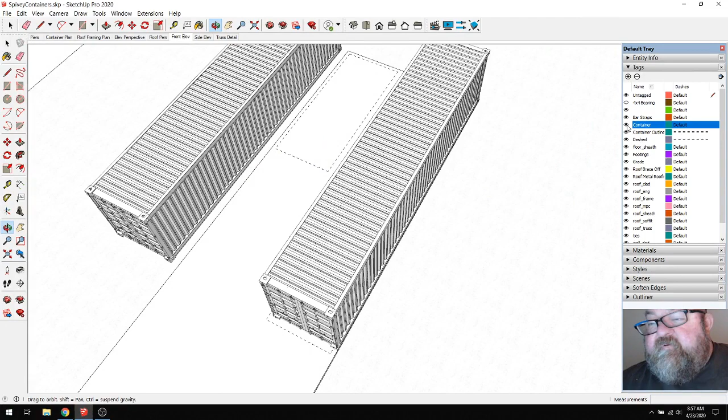Okay, so it is early on Thursday morning and it's raining, so I'm going to be doing some SketchUp work for a customer who has two containers that he wants to use for storage. Notice that they are for storage. I have two 40 footers, so I need a 20 footer. And I can't remember where I got these, so I'm going to go look.

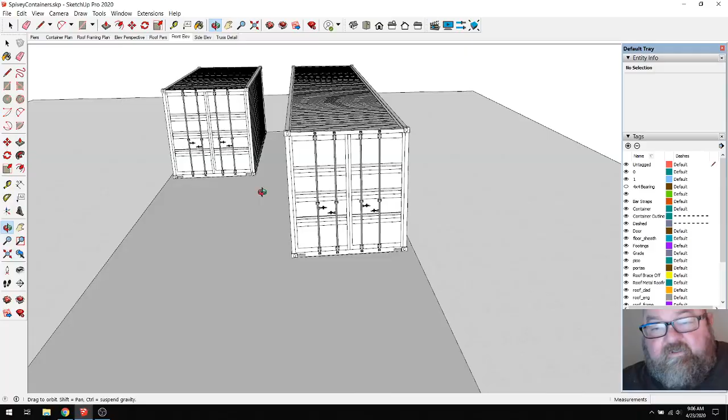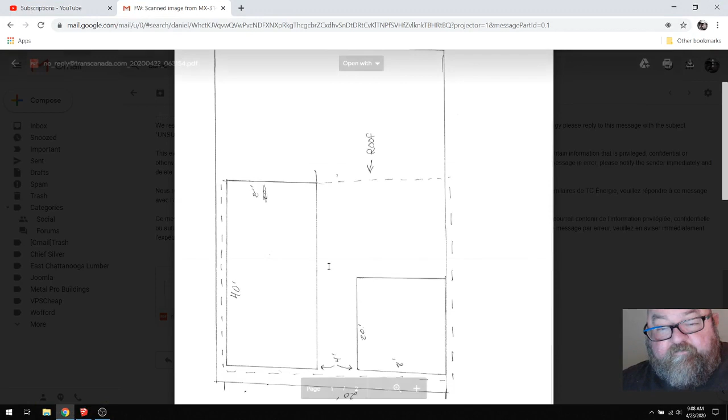Okay, I found two. The main thing is that they're dimensionally correct and they represent a container. This is the configuration I'm working with now. This is the image, the sketch that he sent me. And so what he wants is a hip roof over this. So what we're going to do is turn on our 4x4s and get them located correctly.

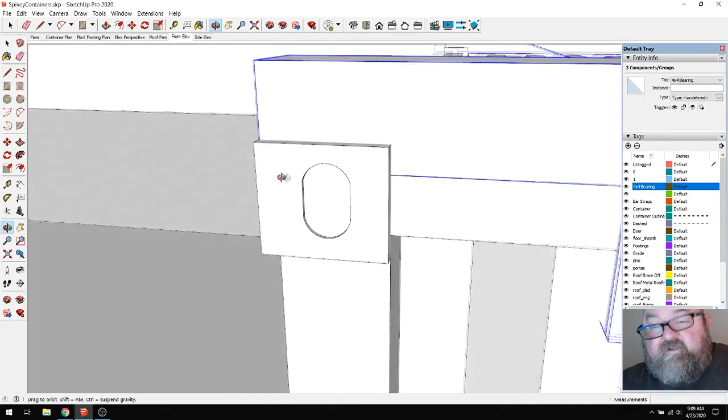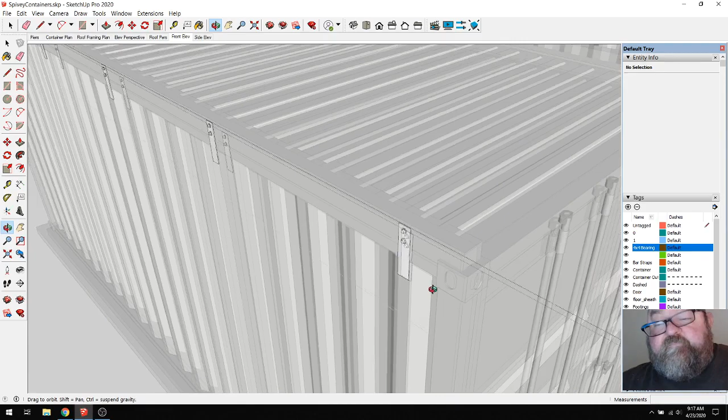The only thing that's a little bit weird about this is you have to notch this 4x4 around whatever this connector buckling corner thingy is. So what these do is these weld to the container and then you bolt them to the 4x4, and that's what your roof system sits on. Those need to be at least every 4 feet. And I'll double check the configuration of those after I get the roof system.

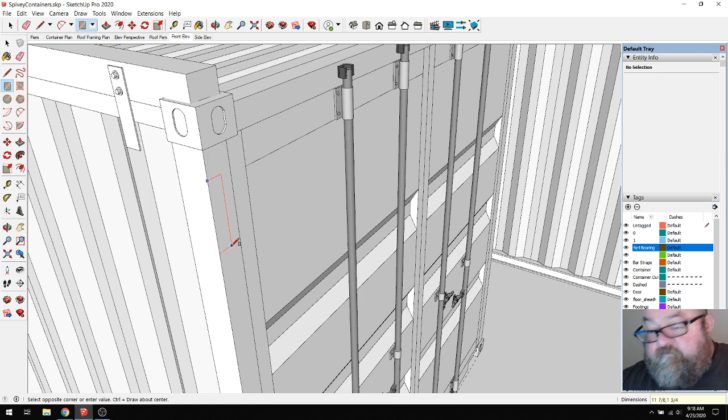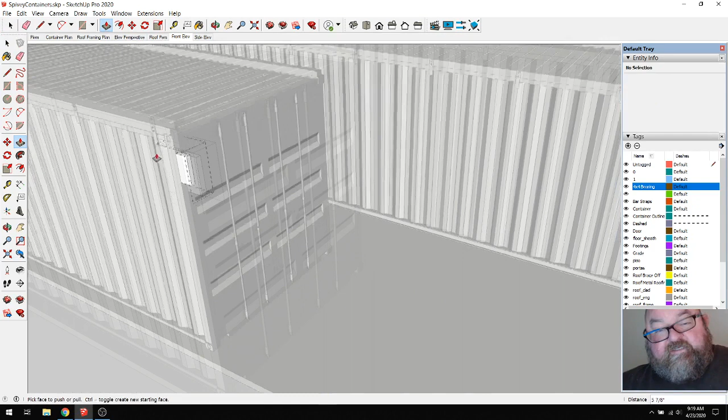Now the interesting part here is that we need a beam. So what we would have is two LVLs. Let's see. Let's draw them right here. Eleven and 7/8 by 1 3/4 inches. Check that. Yep. We'll make this a group. And that needs to come out to here for now. And what it's going to do is it's going to sit up here.

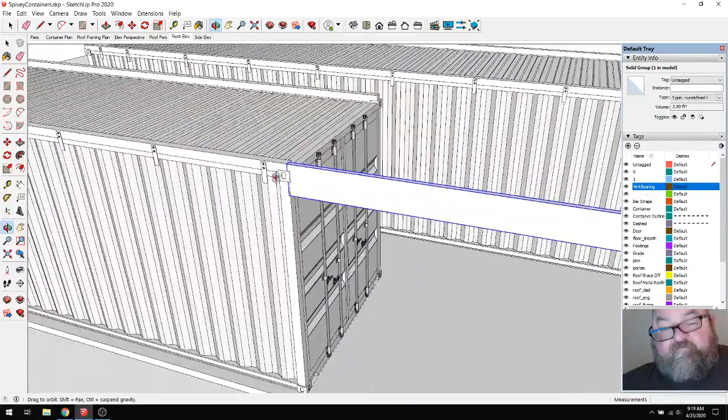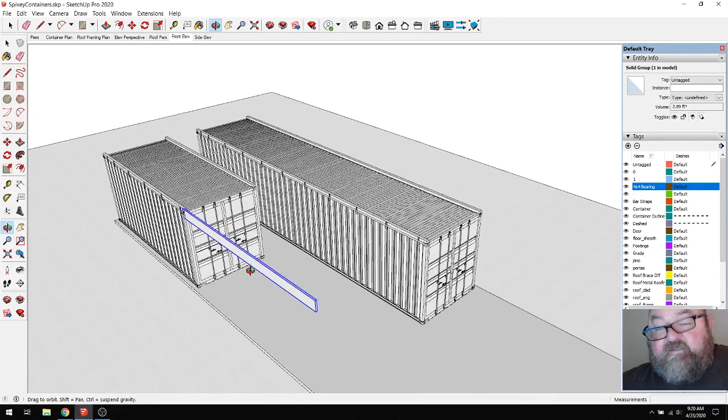And it's going to have to get notched. It seems to be a bit of a waste to put a post here since the corners of these containers are structural. My knee-jerk reaction is to try to notch that. But I'll talk to Daniel, he's my customer, and see if he wants to do that or just put another post. Might be easier just to put a post there.

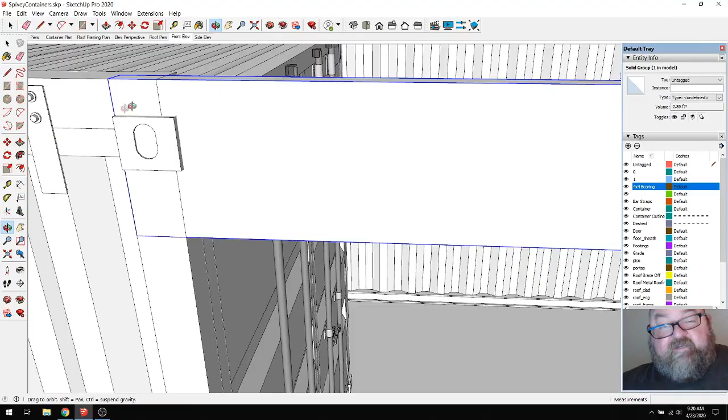Either that or what we could do is weld. We could weld a bracket. That's what we can do. We can weld a bracket on here and then he can notch it also if he wants to go in there. But I also need one coming this way. And we're actually going to double these.

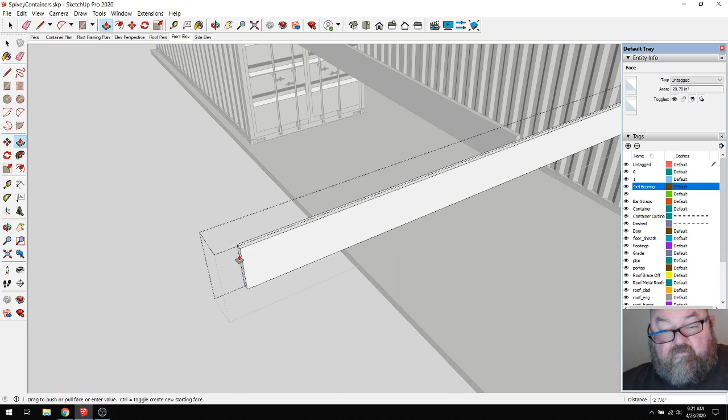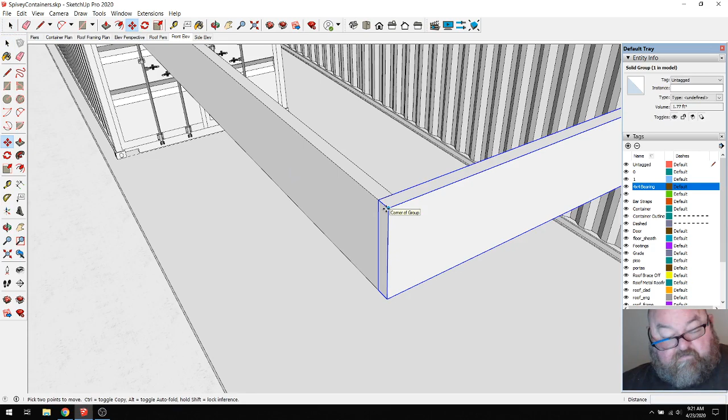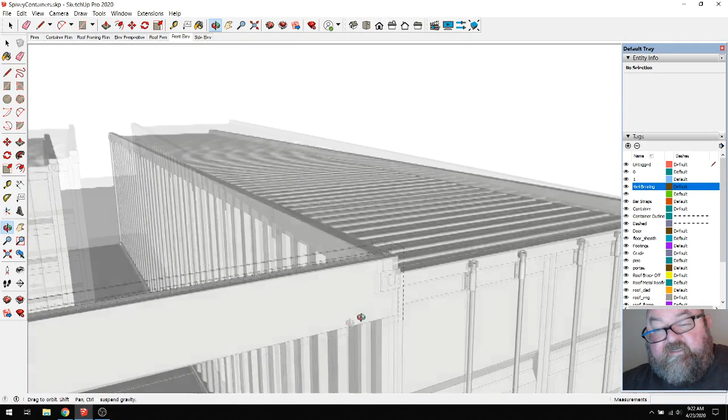So how you do these beams is you overlap them. I'll show you. Like that, and then this one gets... I think what we're going to do is we'll notch it. We'll weld us a bracket, and I'll show that in a minute. But we'll also notch this so that we can tie in that LVL with that top plate, the 4x4. And that's how you want to do your beams at the corner.

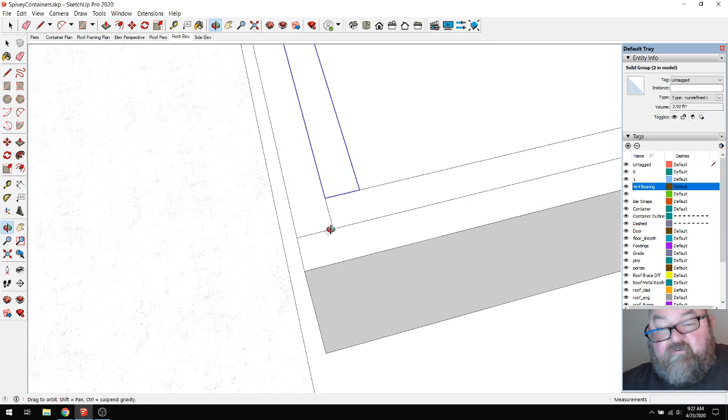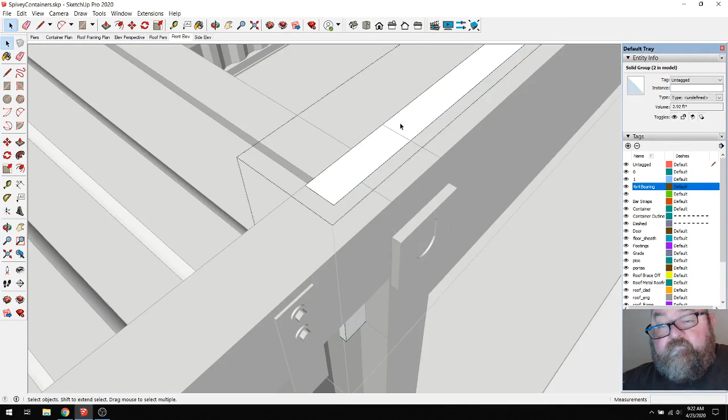So these can kind of bolt or nail into each other this way, and then you can nail into this one this way, and that one that way. That makes the corner nice and snug. And then back to there. Oops. That was right there. There we go. And that's your beams. And then we'll have us a post.

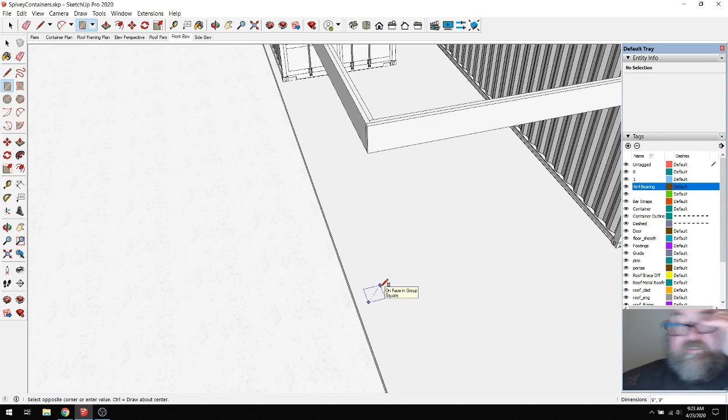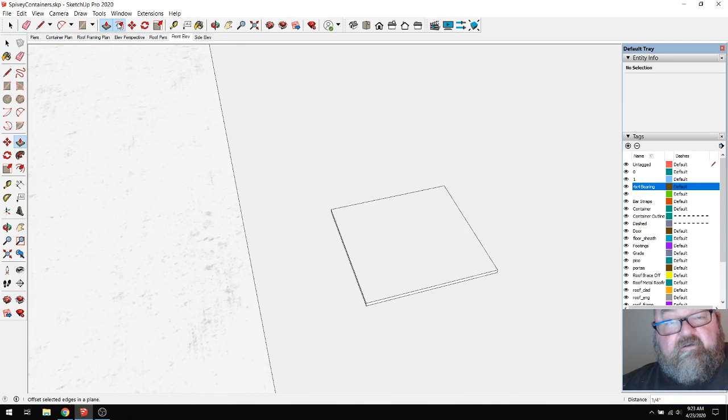I'm going to recommend a steel post, a 6x6. So we'd have an 8x8 plate. Let's see, well, a 9-inch plate. Oh, that's funny. That's what I've got drawn on the ground. Marvelous. 1/4 inch. And then we'd come in 1.5 inches, 1.5. And at least a 3/16 wall. 3/16. And we'll put that back down.

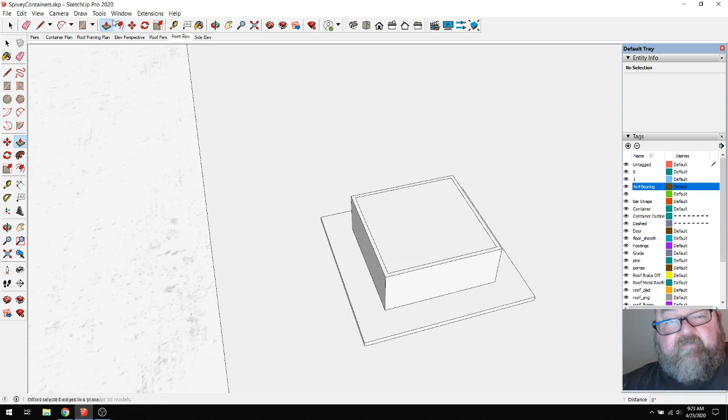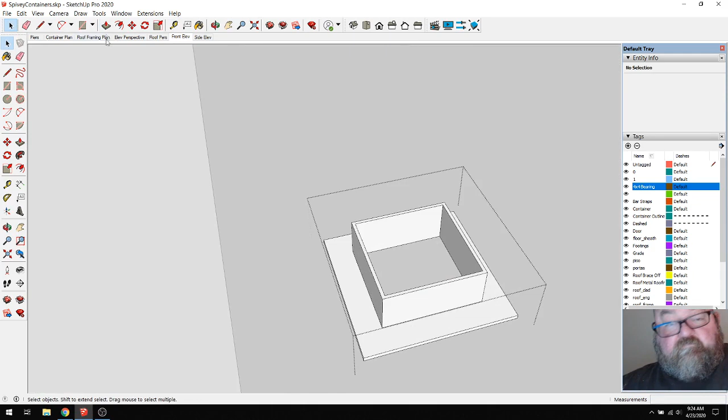Let's go up 8 feet. And we'll figure out where we are. Wait a minute, let's make that a group first. Let's go up 7 feet. There we go, because what I want to do is put this same plate.

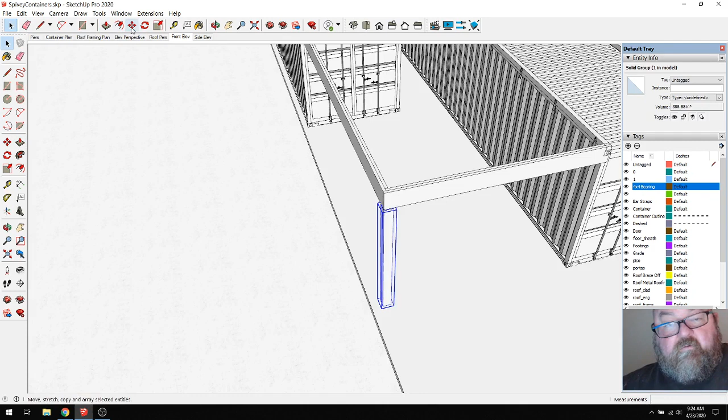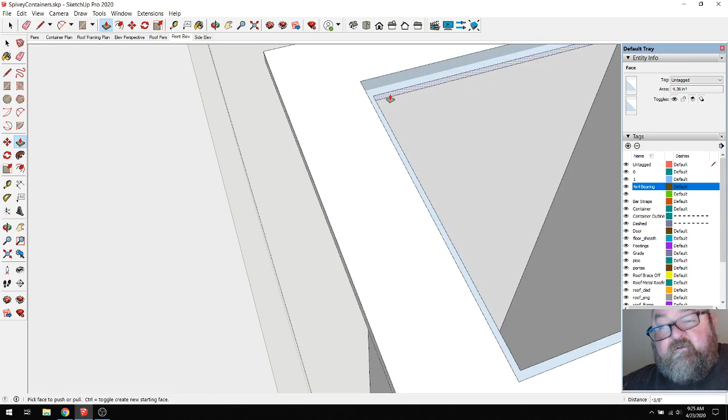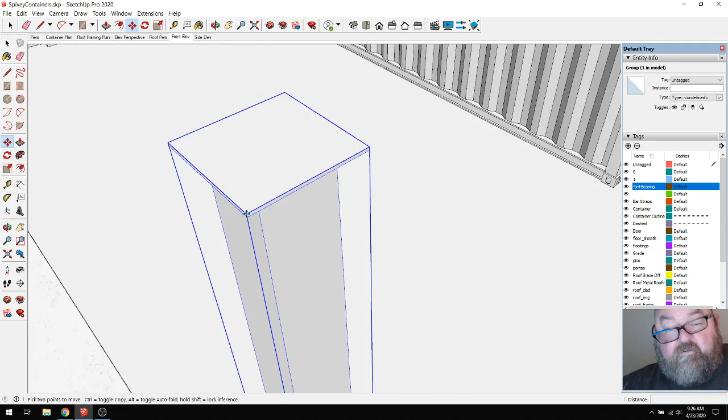This would go down 3/8 or 3/16. Oops. To there. How does that keep doing? Oh, I know why it does that. And then this will just be solid on top like that. And that's your steel column. And then this would go right here. Going to bolt into that.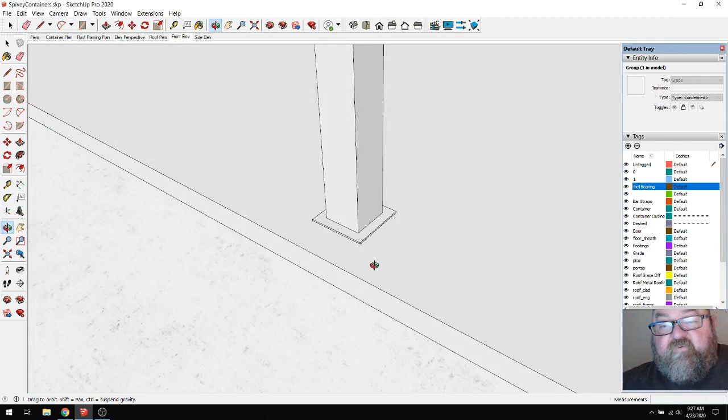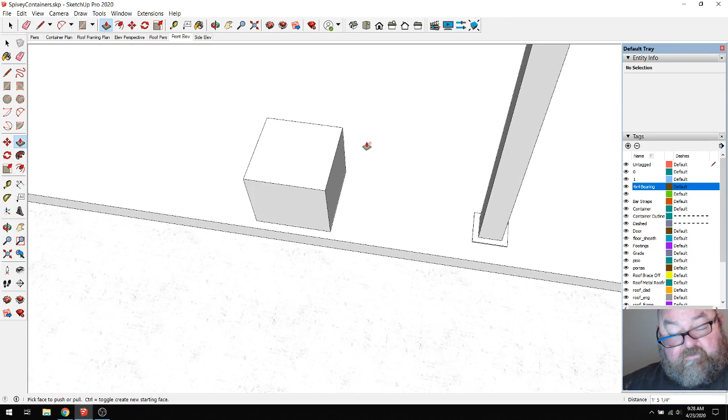And then what I'm going to show here is he's got a slab here, and I don't think it's probably more than 3 or 4 inches. So what he needs to do is cut this out. I don't know what type of soil he's got, but let's go 20 by 20. Yeah. And that thing needs to be at least 24 inches. And then what we'll do is we'll put us a little chamfer on top. Let's see.

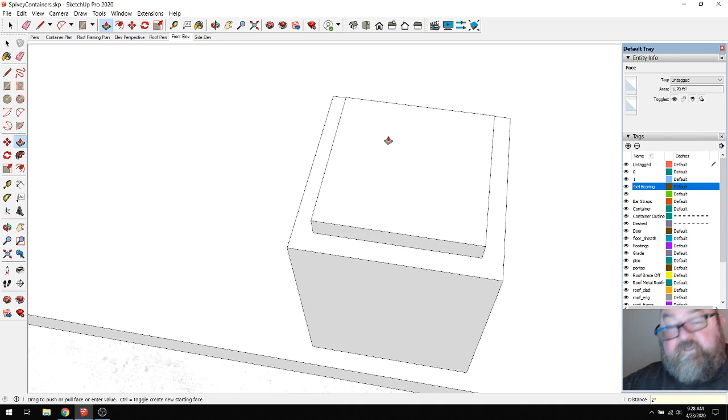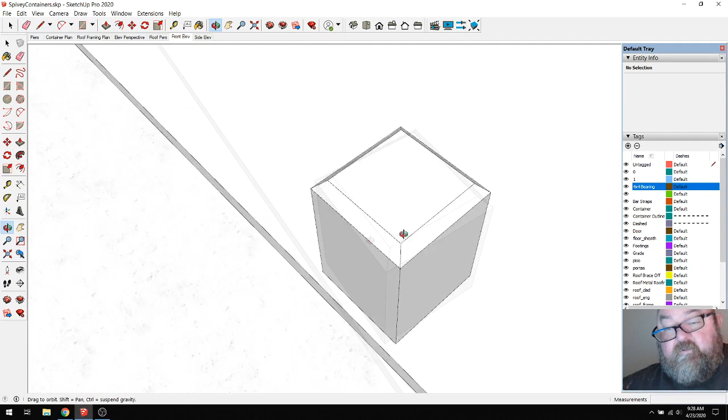2 inches. Then we'll come up 2 inches. We'll put a little chamfer on it, just to make it look cool. There we go. That chamfer on there is probably exaggerated, but make this a group.

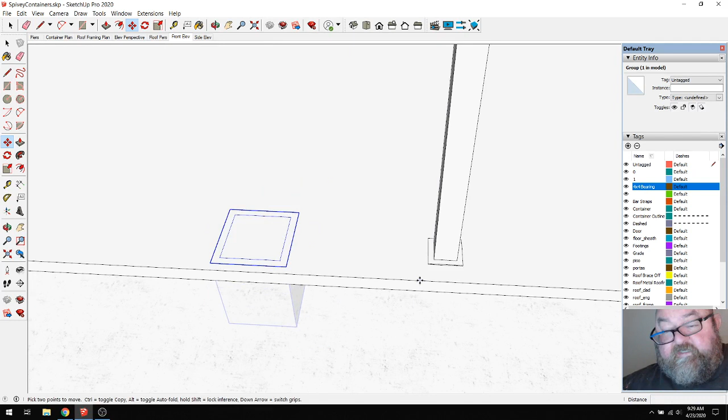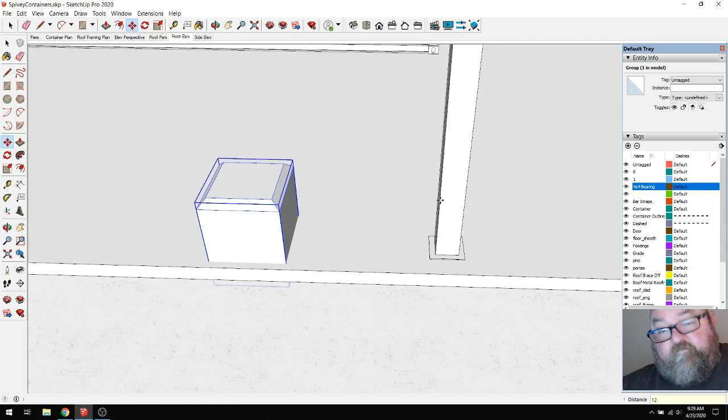Now we're going to stick this. I want this to be up about 6 inches out of the ground, you know, to hold this. Actually, it probably wouldn't hurt for it to be another couple of inches to act like a curb. Or actually, yeah, this column's going to be kind of stuck out by itself, so I would say

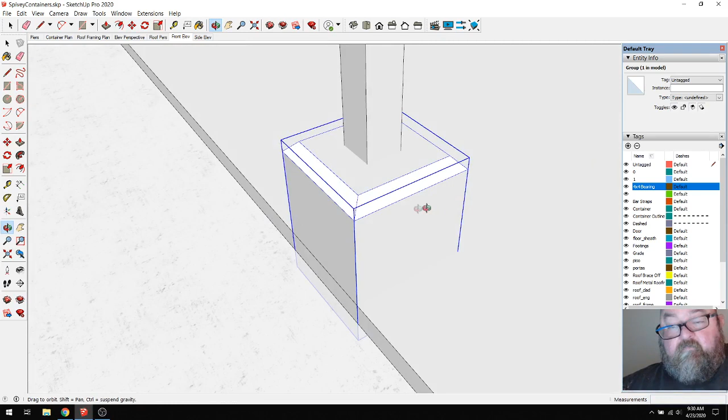get the edge. Let's see. Yeah, I just need to raise this whole thing up. There we go.

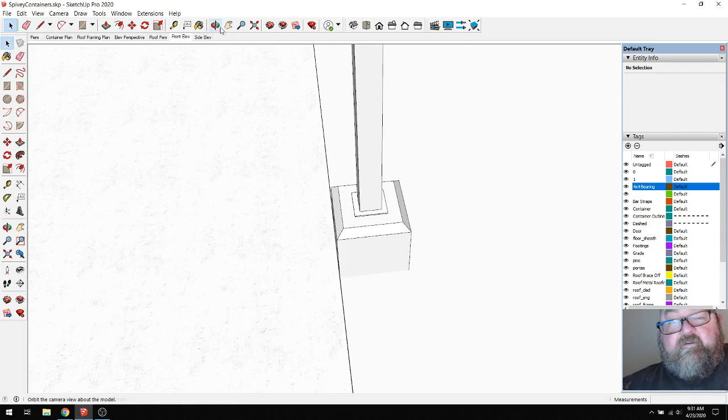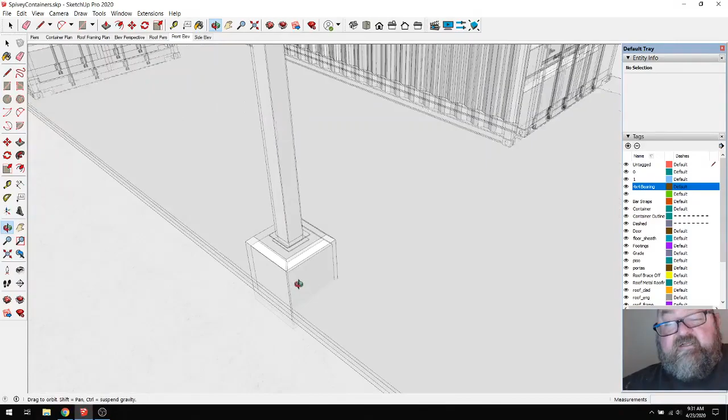Now you've got yourself a column, and you've also got yourself a pilaster or a bollard, so that if you start to run into this thing with your truck, you're not going to knock this column out from underneath your roof. You just want something there to protect that corner in a configuration like this, if in fact you're going to be backing in here. So that's kind of our structure for our roof.

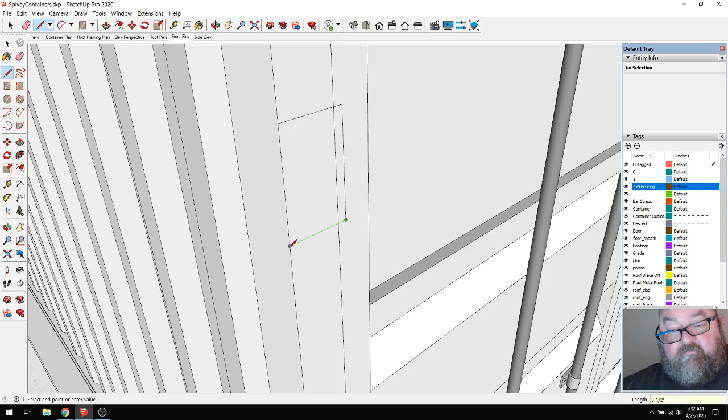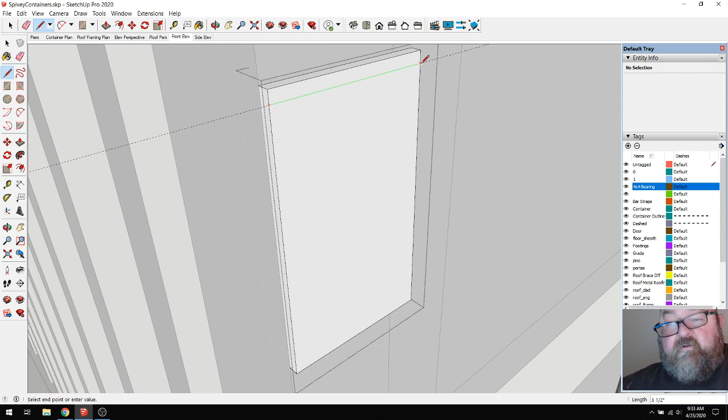Let's do our brackets right quick. Let's get those out of the way. 3.5, 6, and then we'll make this a group. 1/4 inch steel. We'll come down 1/4. And 1/4. Yeah. And then we'll bring this over. This needs to be at least 4 inches, like that.

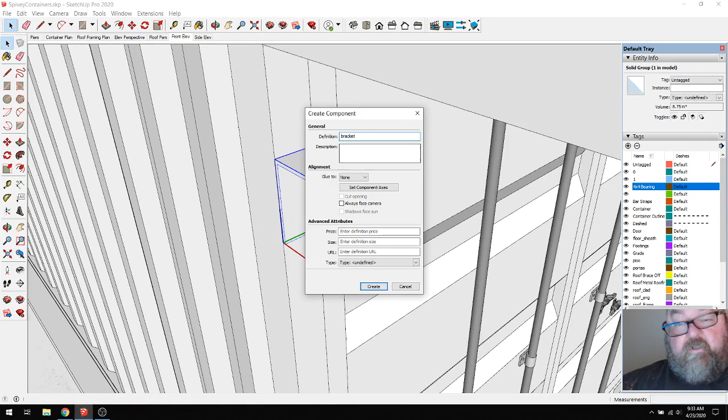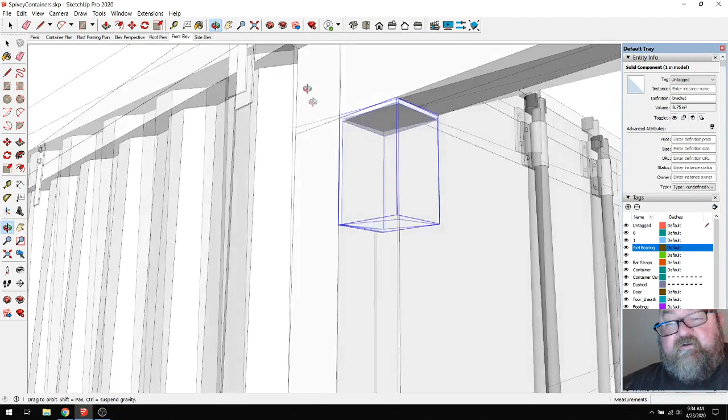Let's go ahead and make this a component, bracket, because I might change it, and I'm going to have 2 of them, and that way I'll only have to change 1 of them. But I think if we weld that bracket right there, we weld it to the corner of the shipping container, and then bolt it into the bottom of the LVLs, that's a nice way to do that. We'll get one over here.

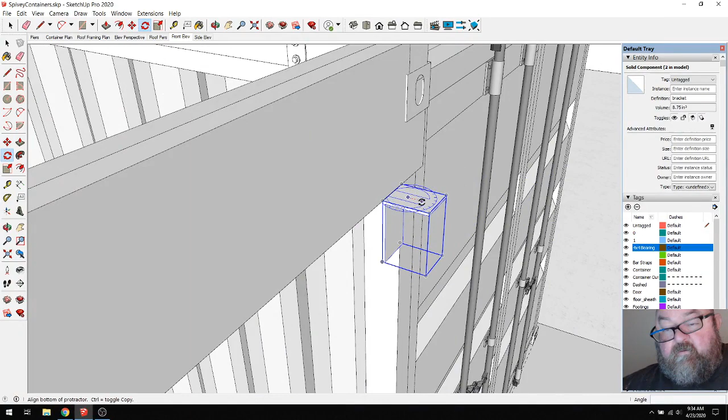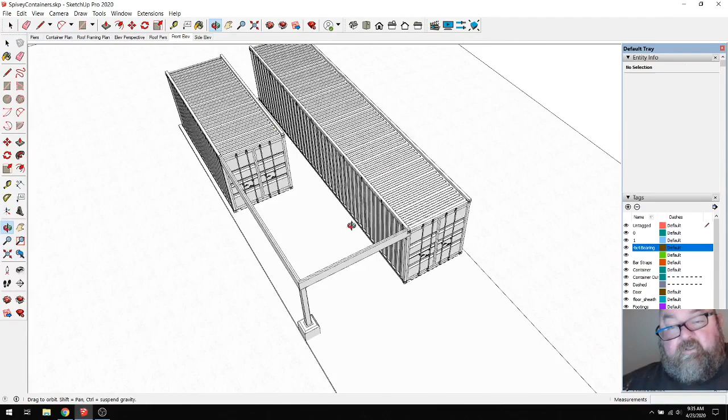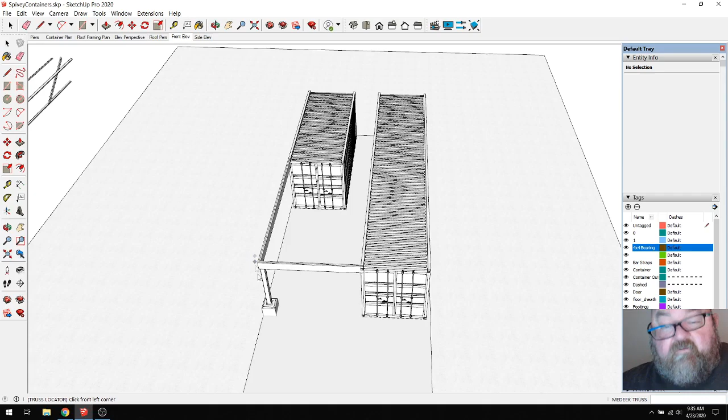Okay. Now the fun part. Let's look at our extensions. Medeek Truss. Thank you, Medeek, for the extensions. And I hope it can do a hip roof, because that's what Daniel wants.

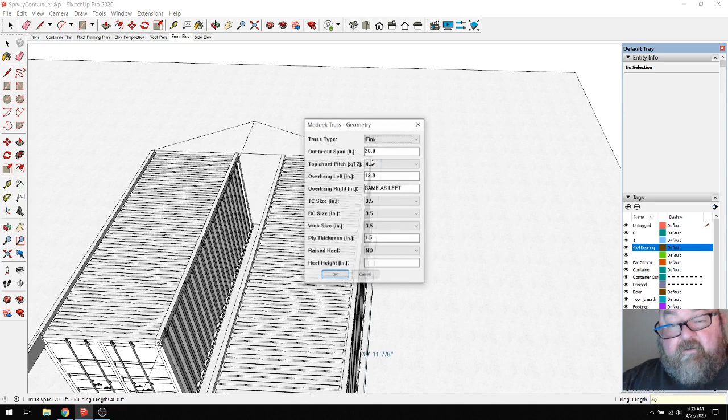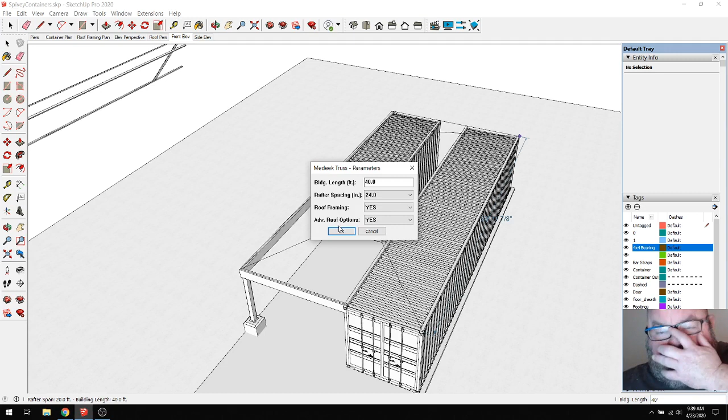Let's see, I gotta go across first. So I need that to say 20 feet, right? 40 feet. 40 feet. 4/12. Ceiling joist, yes. Okay, we'll see. Yes. We want to put the rafters on 24-inch centers. For now, we're just going to leave this stuff alone, and that would be how our hip roof would frame with rafters. Yep.

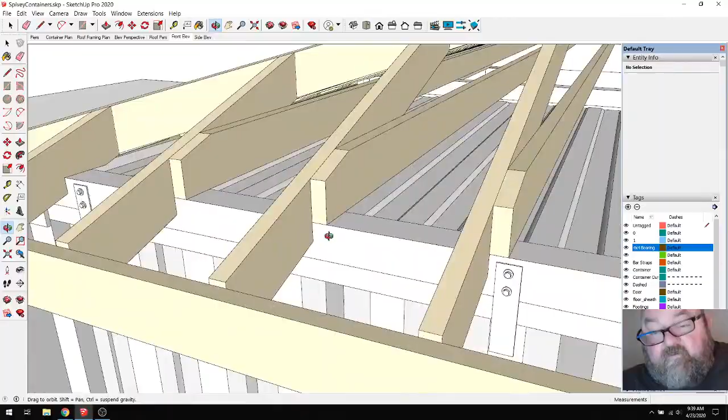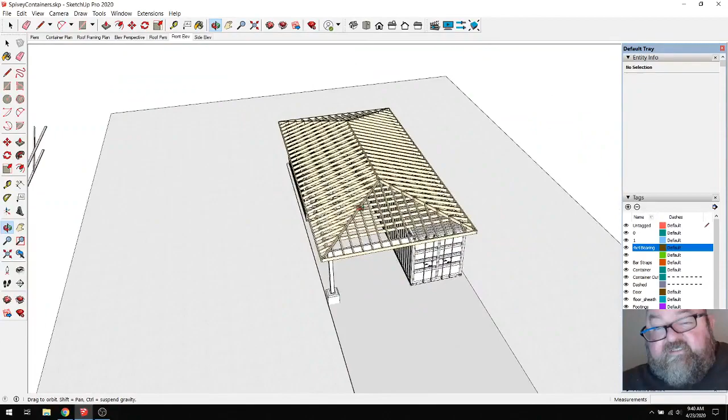So what I may do is show him this and see if he wants to do it this way or with trusses. But that's going to be a neat little project. I think what I'm going to do is show it both ways. If it was me, honestly, I would just use a gable roof and use trusses. That'd be the cheapest way to do it. I'm going to copy all this.

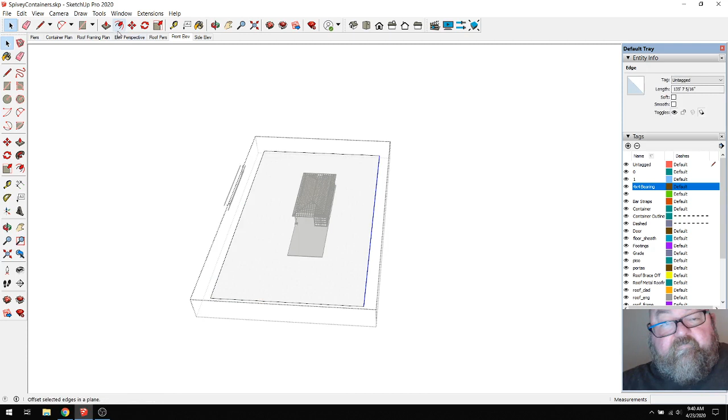Let's make our site bigger, for two of them. I make that background because it gives me something to scroll against. If you scroll over here to infinity, sometimes it acts strange. So if you have yourself a base to scroll to, it scrolls relative to that.

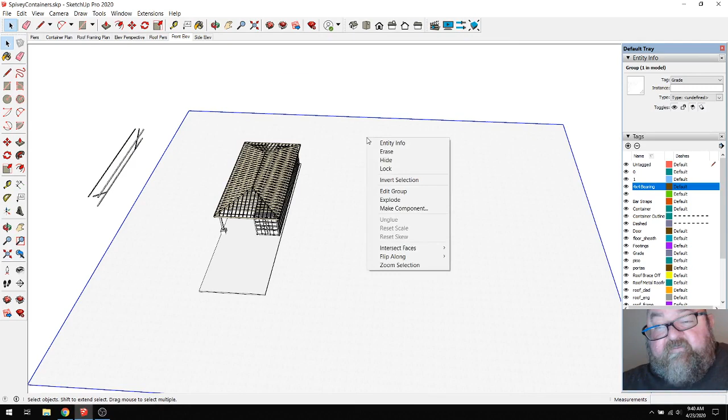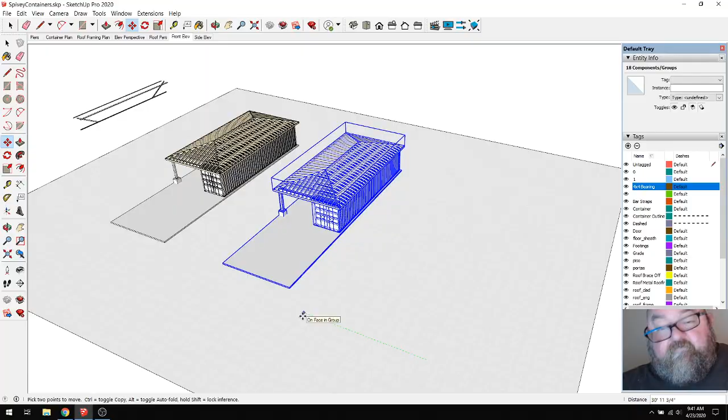I'm just going to copy all this over, and then let's put it closer so I can show them together. And we'll do away with this one and go back to our trusses, and we will do a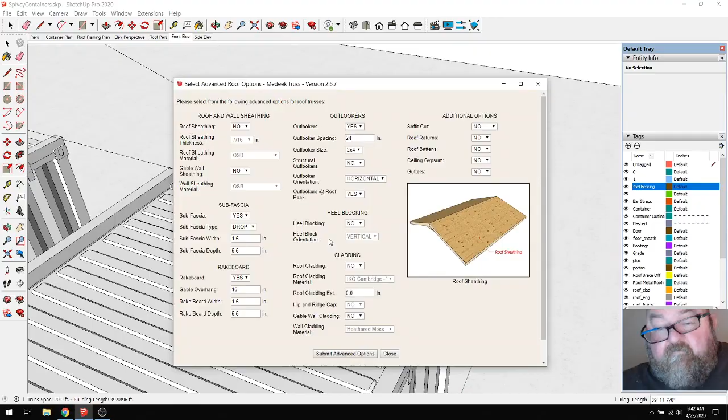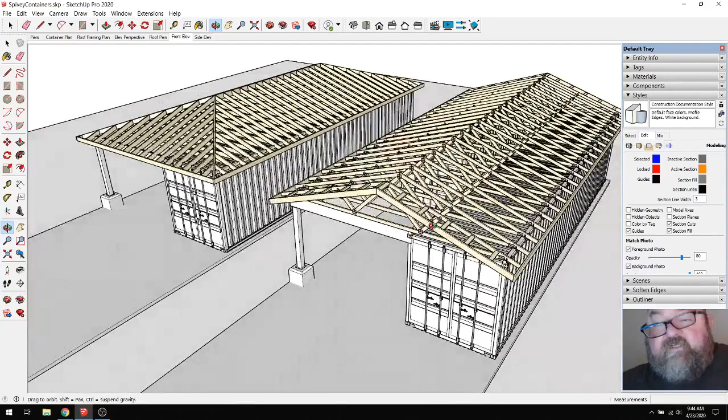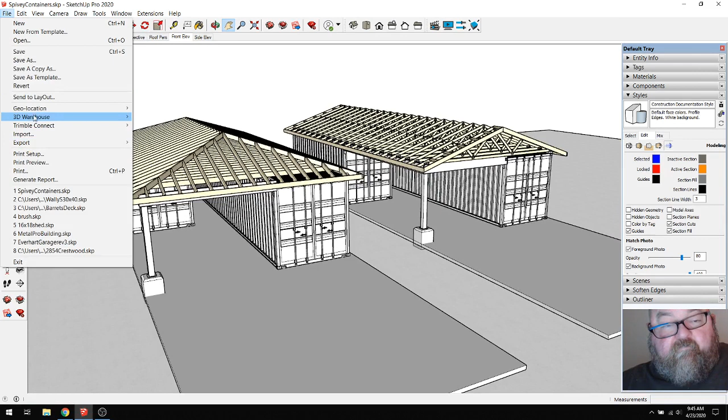Okay. What I'm going to do is send him some images. Put these closer together. I'll try to get this at an angle where we can see both of them, and then just do some screenshots. Let's see.

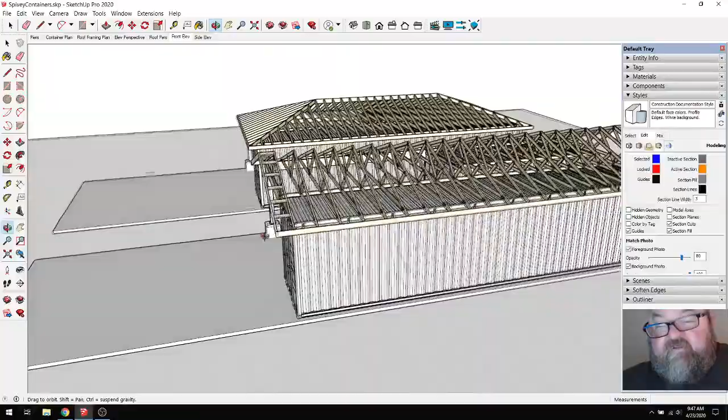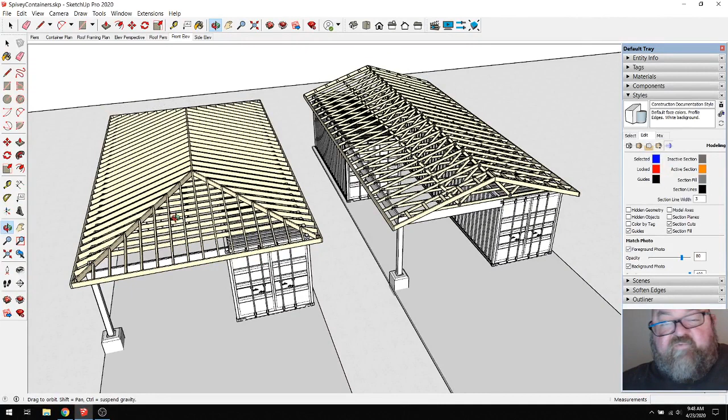Okay, so I will send this to Daniel, and in his next video we will do all the details. We'll go in and turn on the roof decking and fascia and soffit and all that, get into more detail, and then I'll show you how we lay out the plan. We'll set up some views and go from there. I know this may have been a little boring for some people. This is actually for the customer, and I'm just trying to share it with everybody.